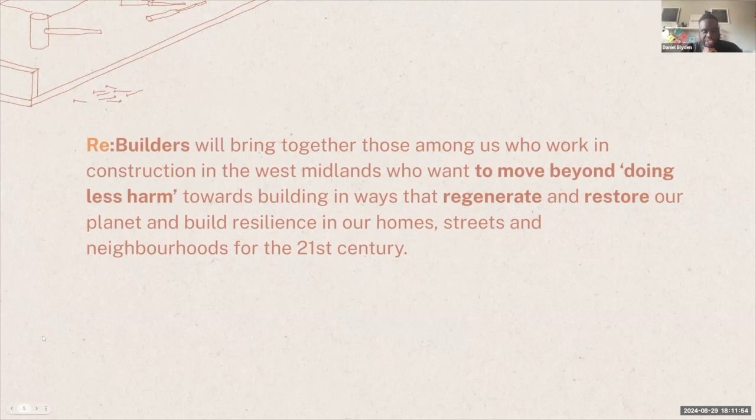We recognize this is a shift that's really needed in the built environment sector, moving from degenerating to regenerating. On the next slide, you'll see a visualization by Bill Reed, who talks about shifting from sustainability to regeneration. In the construction sector there's a lot of talk about sustainability, which sits in the middle of this visualization between degenerating and regenerating. This shows how degenerative ways of building require more energy to sustain, whereas regenerative approaches require less energy. We'll be exploring this paradigm shift and this thinking through the program.

But just to give you a little more background to it, let's go to the next slide.

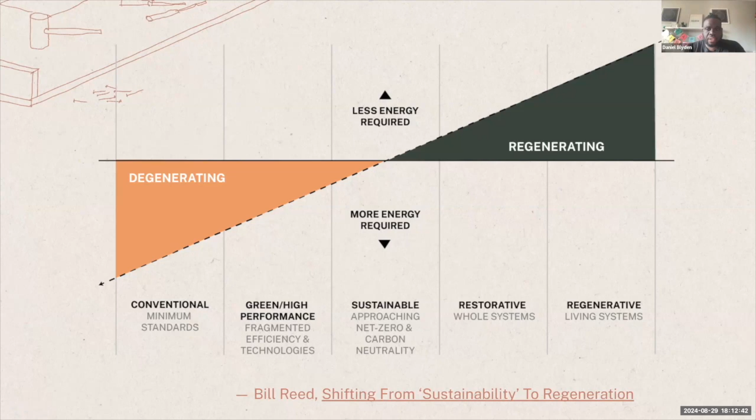We're trying to position this as an opportunity for your business to expand your vision about what's possible with regenerative futures. We'll do this through inspirational site visits across the country, skills boot camps, and live building. We'll hold classroom-based workshops around material futures and how you can build more resilience in your organization to navigate and get to grips with these things. Another theme we'll explore is how we could work more with bio-based materials.

So just to go into a bit more of the structure of how we've put this together, let's go to the next slide.

It will start on the 8th of October 2024 with a 2-day residential at Fircroft College. Then we'll have 4 hands-on skills boot camps and live building opportunities, one within the residential and 3 other dates. There'll be 5 learning visits to different sites, which we'll tell you more about later. Alongside this, we'll host a range of mentors at the forefront of regenerative practice in construction, and you'll connect with them for advice and ideas about the future of your business. We'll also create an action plan bespoke to your organization.

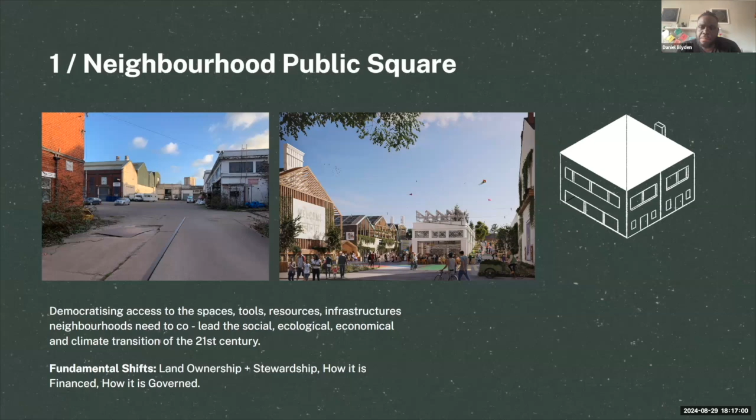The second demonstrator we're working on is called the Neighbourhood Doughnut, which is providing a compass to look at the interconnected challenges we're dealing with, and how we create the metrics and goals, changing the goal of our economy on a local scale. We use the framework of doughnut economics to design this at a neighborhood scale, and do a lot of work to socialize this idea and framework across all levels of our work.

Then finally, we have the neighborhood transitions side of our work, which is all about looking at street-based systemic demonstration of the carbon, energy, ecological, built environment transitions led by the neighborhood. So what that looks like is working with people in their streets, where they live, to look at all these different strands of transition that need to happen at a neighborhood and street scale.

There's many different ways we've been organizing around this, building movements both locally and nationally, which we can share more about later on. But that's a little bit about us, and we've got a track record of doing these learning journeys. We're a multidisciplinary team that works at lots of different scales.

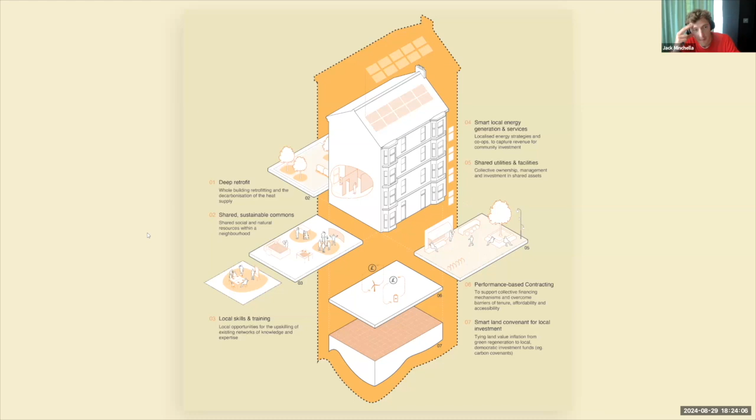Most recently, and I think this is what led us here in a sense, was looking at climate risk extended out for the next few decades, and the current trajectory we're on. There's a positive vision there that I think we're trying to shape, and how do we take theory and research in our practice and bring people on the journey of entering this world so that we can face it together.

And that's us, I think. Thanks, Tony.

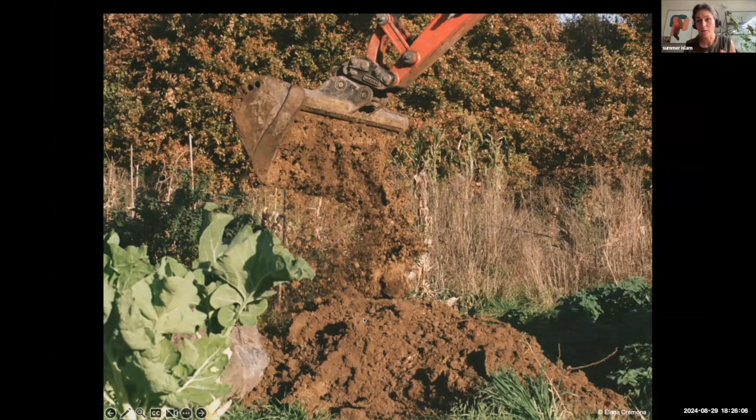Partly that's through the buildings we design, also the research work we do, and the education projects we get involved in. The way we approach the materials we use in the organization is starting to think about waste streams that come from agriculture. We see the potential for the relationship between agriculture and architecture to be reinvigorated, as it was historically in different building practices.

When we design buildings, we work as much as possible to integrate natural materials, and obviously that happens within a regulatory context. So we have lots of experience now of where they can be applied and different ways that's effective on a construction site. We often work with those materials in ways which are modular and employ prefabrication systems, predominantly to bring the costs of those buildings down for our clients, and also to make the process of making those buildings hopefully simpler and more efficient.

Where we're engaging with existing buildings, we look to work with retrofit - either stripping back materials or introducing new ones, trying to understand how you bring bio-based materials into existing building fabric that may or may not be natural or low embodied carbon in and of itself.

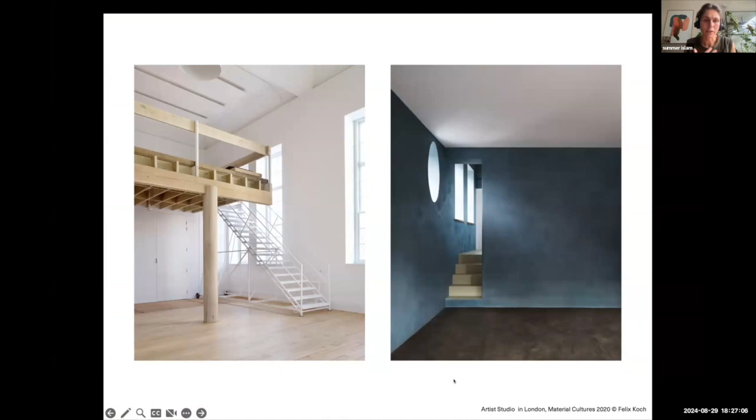The research that we do pairs along with the design. Predominantly we're interested in figuring out where the materials we work with come from, and that means looking strategically at how those materials could be scaled up. Over the last few years, we've begun to understand how the material supply chains work in the UK, and where bio-based material fabrication and manufacturing is already beginning to take place.

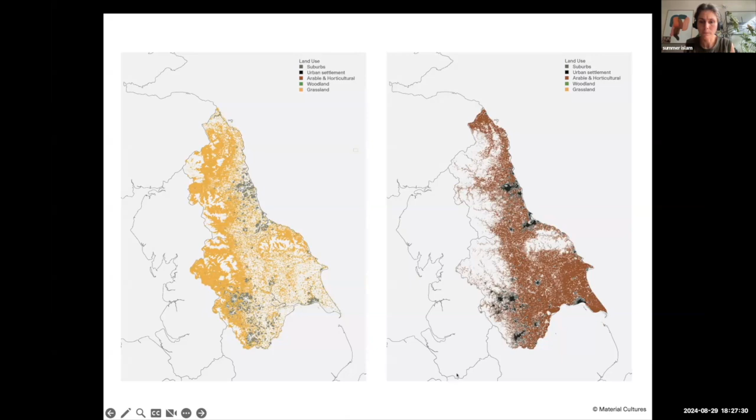Particularly in the context of this program, it'd be really interesting to talk about how those materials and ideas scale, and that's where we want to be taking our design work now - thinking about larger scale building projects.

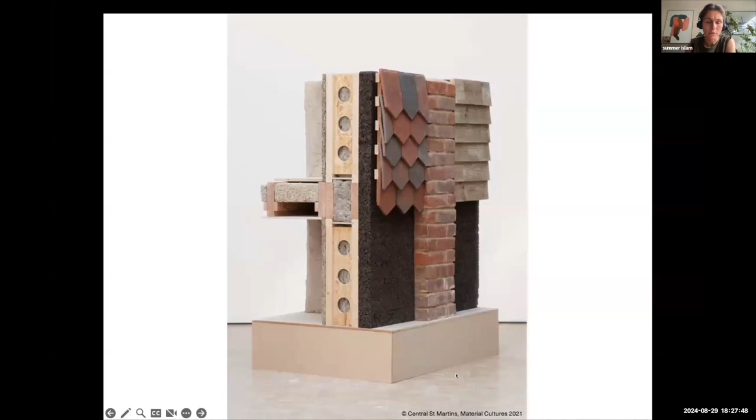Relevant, hopefully, to what we'll be doing together in the hands-on workshops: the way we work in education, to think about the relationship of these different materials and how they're employed in construction practices, is to build and construct fragments at one-to-one - like an on-site construction mock-up, looking at the different junctions and details which become more complex in a building project. That's how we start to resolve and address the building regulations and the concerns of the fabricators and contractors we work with, and it becomes a central mechanism for our design organization.

In the teaching work that we do, we began in institutions, and over time we've moved closer and closer to the factory or the construction site, and hopefully the construction college. So more of the work we do as an organization now is at the platform level, engaging in and facilitating skills provision on construction sites. If we're doing a building that employs natural materials, we'd run a workshop through that project, or independently, we work with skilled practitioners to run clay plastering or hempcrete building workshops, which are open to different people to join.

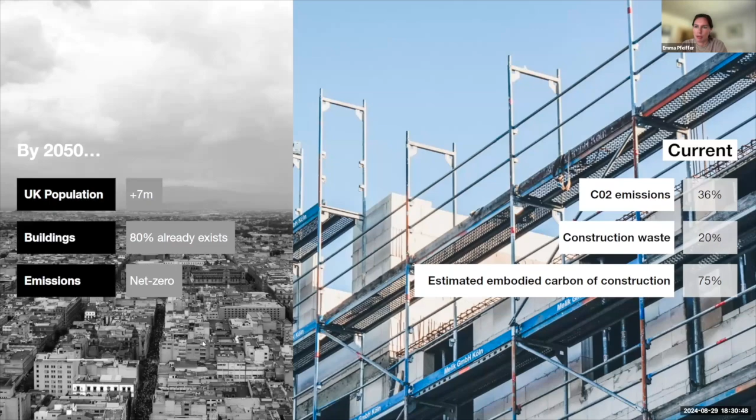This work, 3 Degree Neighborhoods, which has been mentioned a couple times by now, was something we published earlier this year as a collaborative effort between us at Dark Matter Labs and Civic Square, trying to understand the current risks UK urban neighborhoods face in this century associated with climate and ecological breakdown. This piece of work produced a lot of ideas about how neighborhoods and communities can respond to the risks we might be facing. At this point, we're interested in taking some of these ideas, putting them out into the world, and seeing where concrete action can be seeded.

If we could go to the next slide, please. Thanks. This work was based on existing research by climate experts, coupled with some work in design and futuring by our organization. So this is a sense of the palette of things we were looking at in undertaking 3 Degree Neighborhoods.

Next slide, please. So what does a 3 Degree neighborhood mean? At the time of writing, the global mean surface temperature was 1.3 degrees above pre-industrial levels, and most climate scenarios today aim to keep us below a 1.5 degree change threshold. But we were looking at 3 degrees. Next slide, please. In order to point ourselves toward ambitious action, because the current trajectory suggests that by 2100, we will in fact have broken a 3 degree climate change threshold.

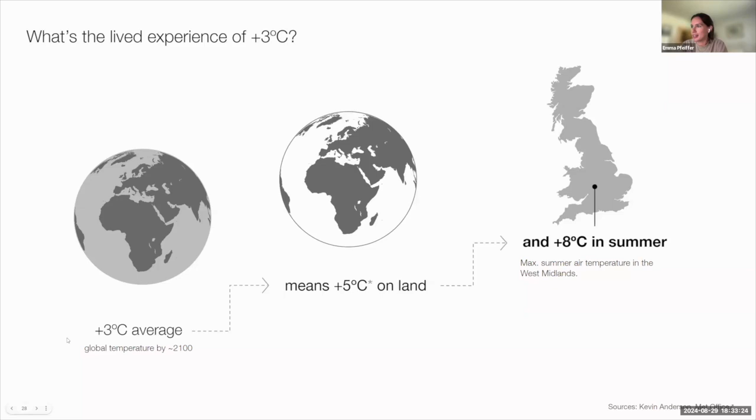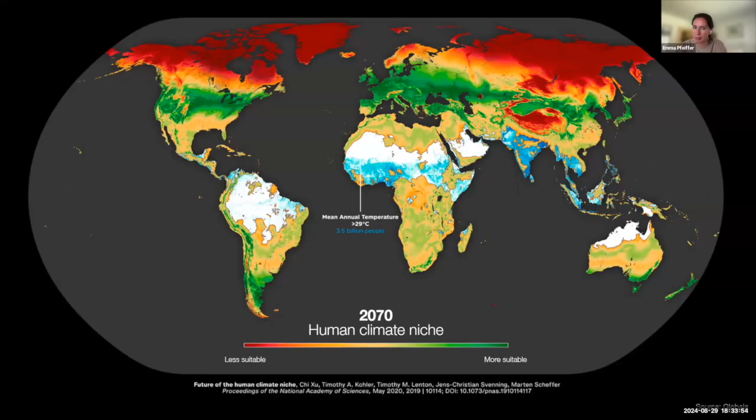So heat is one of about 6 entangled risks that we looked at as part of this work, along with drought, flooding, food shortage, climate migration, and the cost of living. You'll see here that in addition to these more straightforward measurable risks, there's also a strong layer of social entanglement.

So today we're focusing on heat for the purposes of this presentation, but we couldn't isolate any one of these risks from all the others.

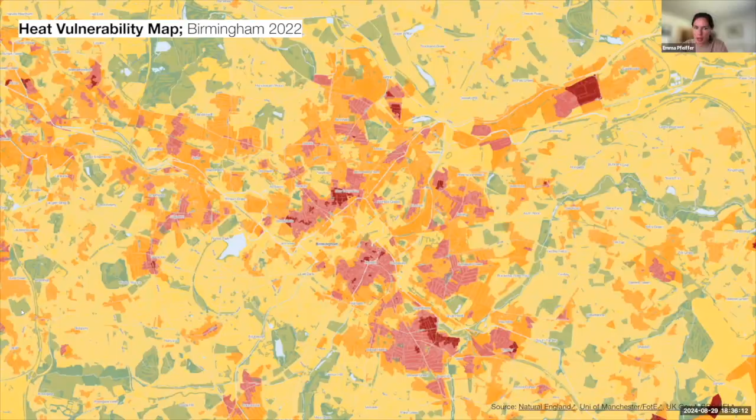And at the global scale, this idea of uneven distribution applies across historic emissions. So it could be said that on the basis of per capita carbon emissions since the time of the Industrial Revolution, higher emitting countries such as the UK and the USA have a higher responsibility to act. This is part of the reason we're so interested in bringing this work out into the world.

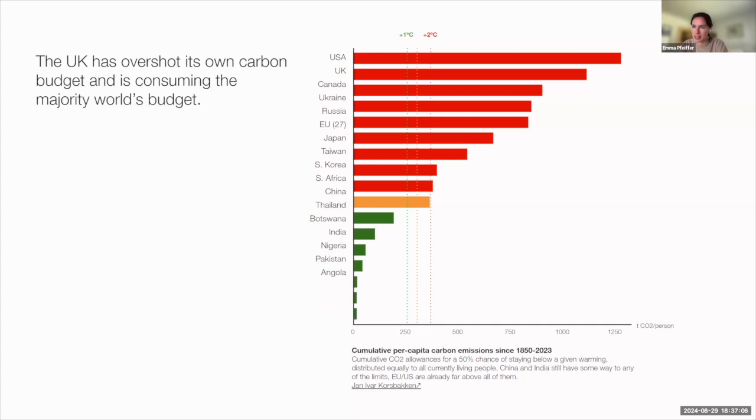So at the global scale, this uneven distribution of climate responsibility could be discussed through ideas like carbon budgets. But we're interested in finding new ways of talking about this at the scale of the neighborhood, to think about what it would mean to take responsibility for emissions associated with the places that we live and the ways that we have lived over time.

More or less, the point is that climate breakdown and global temperature rise are symptoms of a problem rather than the problem themselves. As we've seen, the built environment is really mixed up in these issues. This is part of the reason why we're interested in working with the construction sector to think about what this means for people working in the built environment.

And I think I'm going to pass back over to Jack at this point.

And so as we've seen with the built environment, there's an urgency with which we need to engage with this at a much deeper level than just the carbon emissions of the buildings. Yeah, if you jump to the next slide.

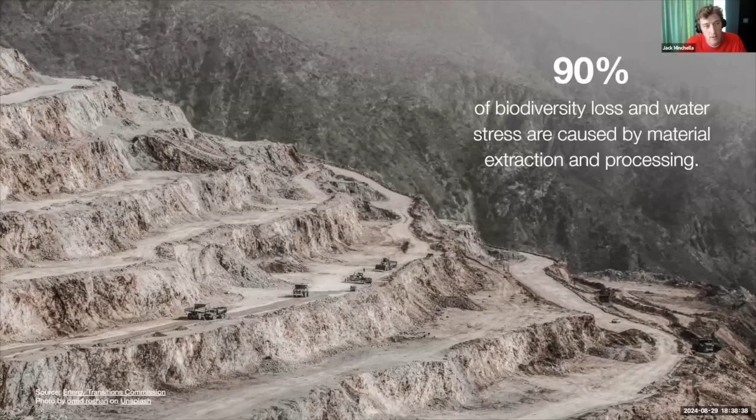Material consumption is a huge driver of biodiversity loss and water stress, and that will continue because the green transition, and how that's currently structured in terms of retrofitting and renewable energy, will demand a greater amount of materials than we're currently using. So some of the solutions are driving the problem even further. How do we engage with that on a more structural level, and then figure out how we can test new things at the real local scale - that's the focus of this learning program really.

And if we look at our carbon budgets, even to 2030, we need to reduce that by vast amounts. So this can't just rely on the material side of things. It's also like, how do we work? How do we understand our networks of influence? How do we innovate into that future?

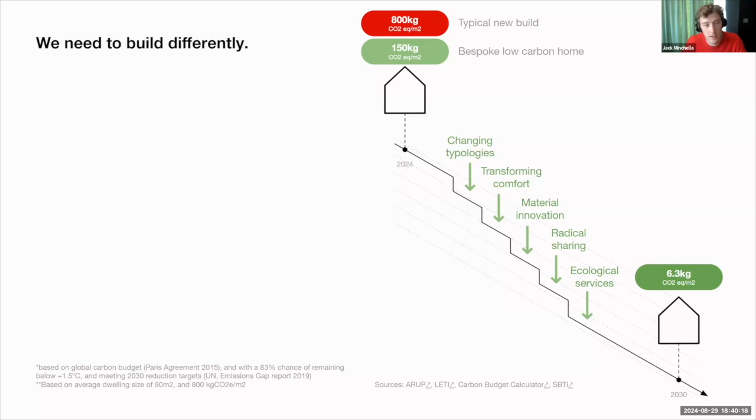How do we operate differently, socially, in relation to our technical efforts to reduce carbon and shift the construction sector? That's how we want to bring to this program some thinking about how we consider a neighborhood's social infrastructure and physical infrastructure, and what it means to be an individual or an organization running in the neighborhood with an eye on that future, rather than just through a product or service lens. It's more about bringing in this wider picture of engaging with the wider context.

So this was a little bit of the drawings - these are all published online, and we can share some links to these. Just looking at some of the interventions that might happen and the co-benefits that stem from those, bringing that lens of asking where we draw these connections and how they manifest at the very local street or neighborhood scale.

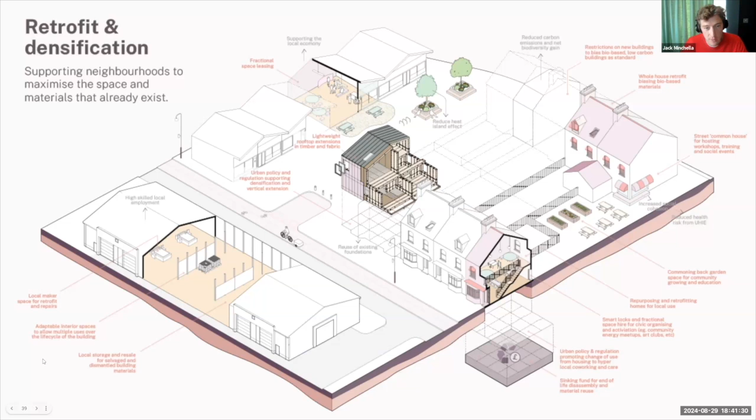So this one was looking at retrofit and densification as a core bit of transformation of the neighborhood. The next one looks at regenerative resources - not only materials but energy infrastructure and water infrastructure as well.

So Re:Builders is about taking that large global context and bringing it down into a learning program over the next 6 months. That's really what we're trying to do - join some of those dots, bring people into that conversation and into the knowledge bank we've built up so far, and then explore further what it means in real life.

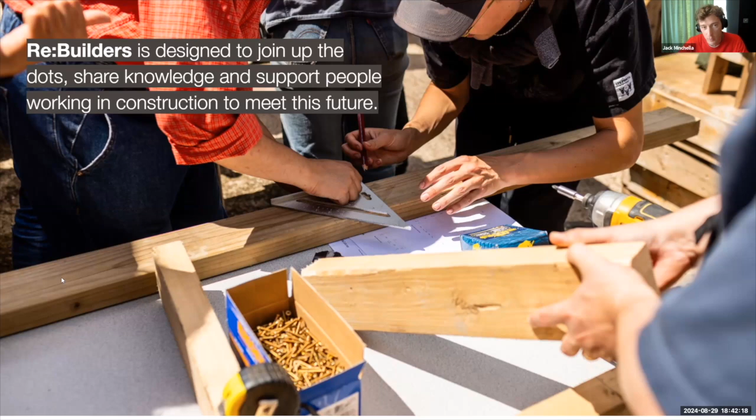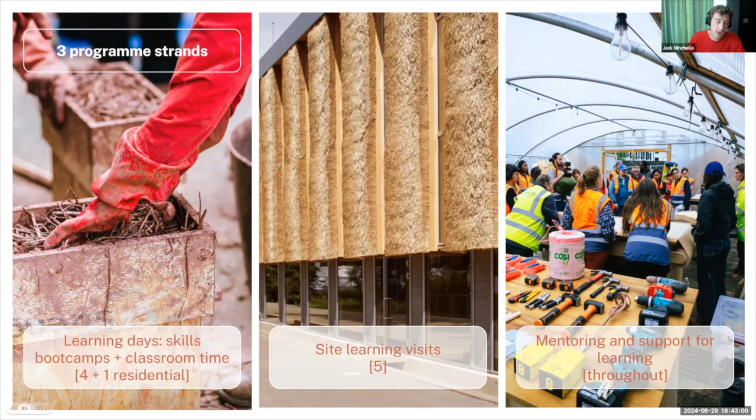That's going to be the sort of flavor and structure of the program itself. Some of it will be learning days, with classroom time focused on some of these things we just talked about. Some of it will be about how people have already been looking at this and building it, with site visits and learning around that, and then connecting to people already putting it into practice with mentorship and support - thinking about your own business or your own professional journey as well.

There are some themes we're working with in terms of the overall context. We want to look at materials and how they sit in the bioregion, which you've heard about from Summer and a bit from Daniel, and the networks and neighborhoods and Civic Square's role in that, and how it connects to the donut economics work. And then some thinking about co-benefits, and how we link different transitions we might see in the neighborhood, or even services that might happen in social infrastructure around that.

That'll be the theme and flavor across the 6 months, and obviously then it meets the practical learning and hands-on experience, which will explore more of the materials and processes, and some of the supply chain work around that as well.

If you jump to the next one, Charlie. So maybe I'll hand back to either Daniel or Charlie. Summer, if you're okay to share a little bit about the building scale side of this now, that'd be wonderful. Yeah, just give me a sec to set this up again.

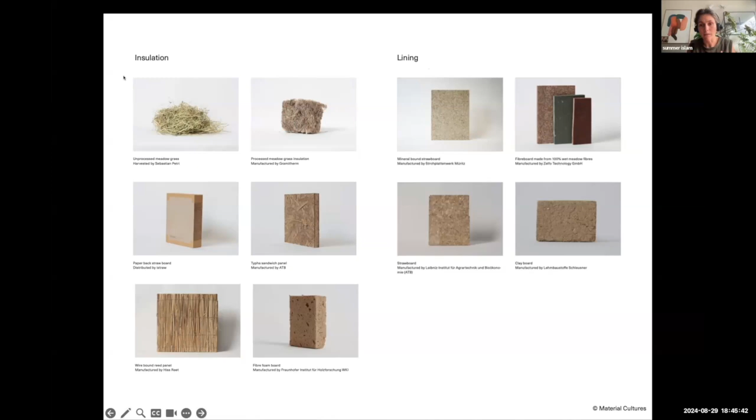So thinking about the standard things used to put a building together, and how they can be substituted for bio-based alternatives - essentially materials made with plants that sequester carbon, reducing the embodied carbon of the building and also making the environment of the space healthier to live and work in. We'll be talking about not just the materials we're looking to substitute, but also the impact of the mainstream materials on the environment around us.

So I think part of the curiosity we have and that we'd like to share is what the materials are made of, where they come from, and what the impact of making them is - downstream in terms of pollutants, extraction, and the kind of social impact of different forms of material fabrication.

And I think the consideration there is not just for the broader environment, it's also for the bodies of the people who work in putting buildings together. Lots of the materials that are mainstream today have different levels of toxicity that are less well appreciated in society, and it makes the labor of putting buildings together incredibly dangerous in different ways.

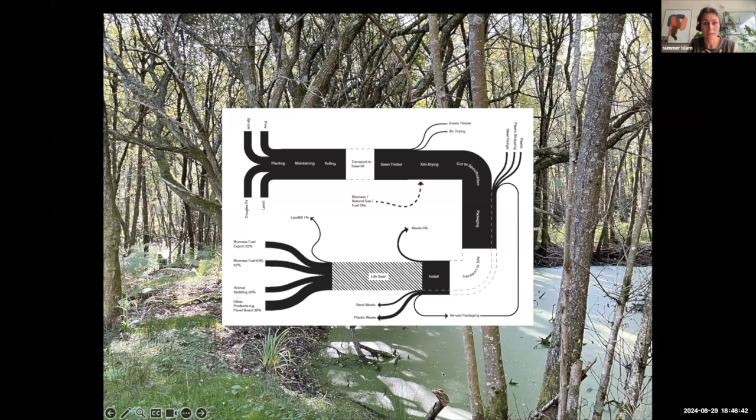When we have that conversation around what materials we could be exploring in the future, we're also interested in thinking very technically about how they can be applied in new builds and retrofit applications in ways that meet the regulatory system we operate in.

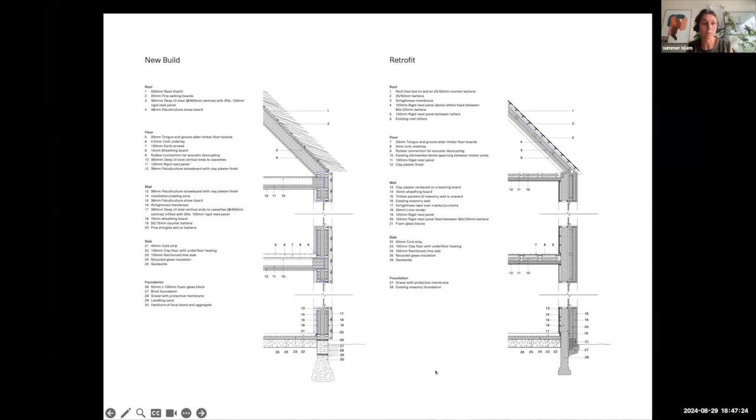There's lots of really exciting and innovative material work out there, lots of new bio-based materials, and quite a lot of traditional ones we know used to work really well, things like thatch and other vernacular techniques. But the focus of our conversation is what's practically available now that we could apply within the building industry today - what change is accessible to us that we can begin to employ.

The next step, maybe a secondary consideration but still important, is the way those materials are applied - that they are and can be very beautiful, and there's different ways of employing them, whether embedded and concealed within a structure, or expressed. I think there's lots of opportunity for new skills to be learned, and for the repertoire of techniques and green resilient skills available within your organization to grow.

It's an undeniable factor that there is cost associated with changing the way we work, because the whole industry we operate within is very inert and slow to transition. One of the ways we talk about addressing this is through techniques of prefabrication.

There are modern methods of construction that are scaling up. We think there's lots of opportunity for things like SIPS panels to be made with bio-based materials, just as they can be made with polyurethane. It's really all about technique and skill, and those are things which are very accessible to people who work in industry.

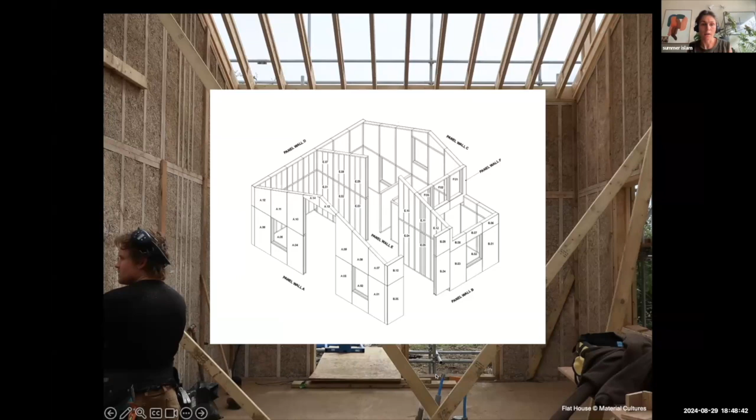We've got quite a lot of experience now in building with and implementing modular bio-based systems, and when we do this as designers, we look to generate building typologies which are replicable - thinking about how a building in one place could be deployed in another, which enables us to think about economies of scale and bringing the cost of these materials down.

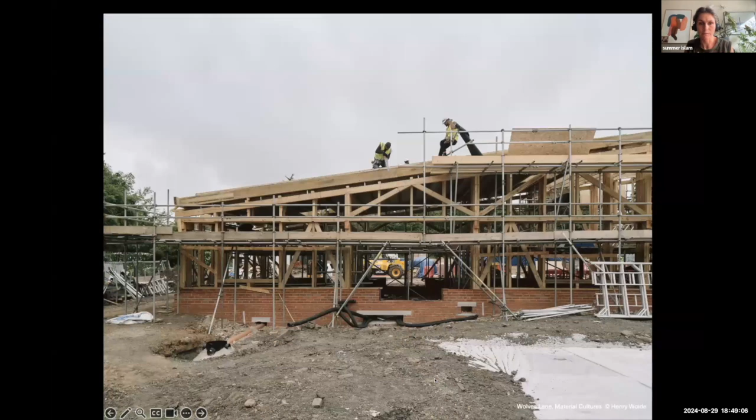In the context of the program specifically, we're thinking about how the building site, the construction college, and our space together in conversation becomes a place of learning. And I think we're really interested in a dialogue around how these skills and these opportunities for organizations like yours can begin to grow and to scale.

What we do in practice is we use building sites as ways to bring other people along with us - whether that's members of the community or the contractors we work with and the different SMEs whose skills we rely very heavily on.

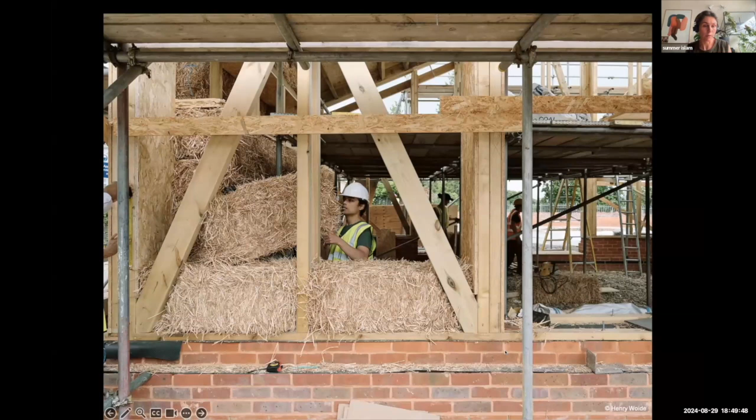Essentially, this program is about extending the skills available within the built environment industry, and making the work you already do climate resilient in the future - to really think practically about what it is when people talk about green skills and green jobs. What do we mean, and how do they begin to tangibly impact the work you do on a building site?

Also, I think to think differently in the future in the context of the neighborhood scale work that's been described, about how buildings can come together. Are there different layers of responsibility, where you have shell and core delivery from contractors, and some of the fitting and finishing and fit out either from a subcontractor or maybe in the future from a community within the neighborhood scale?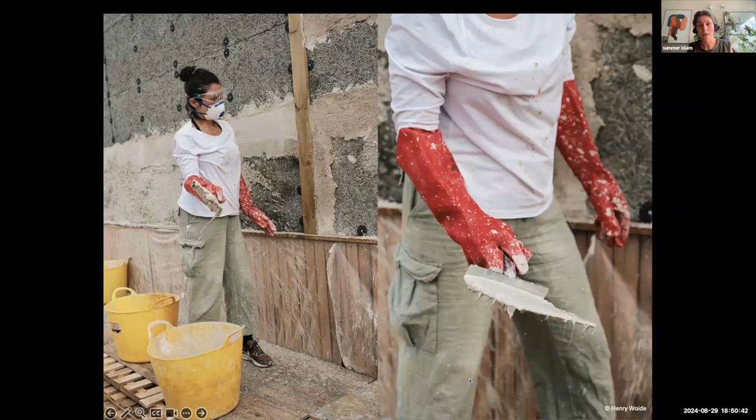That's kind of the work we've been doing - looking at how you empower communities to finish the buildings themselves, but also more broadly, how do we make what are conceived of as traditional or heritage skills mainstream? Things like lime plastering, for example.

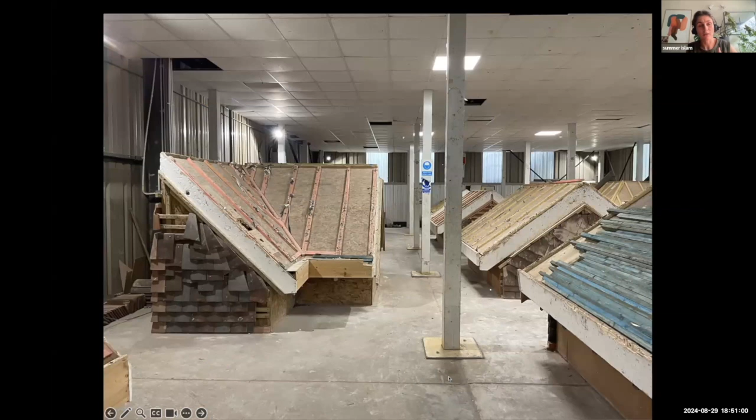Through the work we've been doing recently, we've been visiting and consulting with lots of construction skills colleges and providers. Part of what we'd like to do with this program is talk about how we grow the demand for these different materials to the extent that skills provision in construction colleges and schools can begin to be impacted. Really, the place for that to happen is within the businesses, within the people doing the work on construction sites. That dialogue is something we're really interested in having with you, because ultimately we think there's an extraordinary opportunity for change.

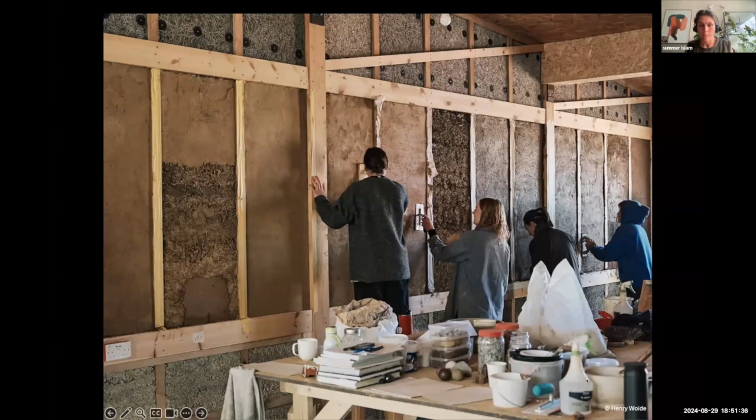Whilst there's a spectrum of exciting, niche and innovative bio-based building materials that aren't yet regulated, tested or certified, there's actually loads that are ready to roll in industry, and you can buy them from local material suppliers and building merchants. We're going to look at how those different systems come together, thinking about ones which already have traction in industry and that traction is looking to grow. Also, skills which we think will have resilience in the future because they'll grow in popularity could begin to be embedded in the organization. These are currently considered quite high-end niche things, maybe clay plastering or lime work, but also modular systems that work with very low-cost materials like straw or wood fiber.

In the course of the program, we'll lead you through a series of skills workshops, working ultimately towards the production of a building fragment, not exactly like this one - this is one we made earlier. Maybe using materials which are a bit more mainstream and relevant in your average construction project today in the UK. At the core of these skills workshops, we'll be working with certified installers who have experience in natural building materials, giving you the opportunity to interrogate them about the pragmatism of the materials they work with and how they employ them. We're looking at materials which have a direct role of substitution in conventional building fabrics, so we start with the ones we already have to hand.

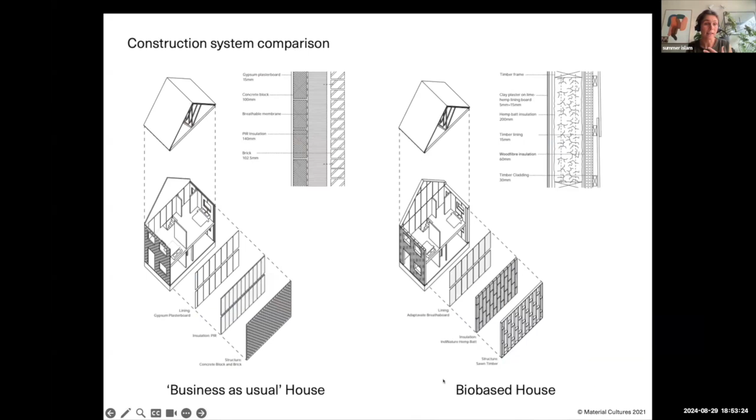Yeah, thank you. Hi, everyone. I'm Emmy from Civic Square, and I wanted to pull together before passing over to the second half of this, which is going to tell you even more about why we're doing this and what it's going to look like practically as a program. We all in many different ways have quite a self-interest in doing this work. A lot of the sites that are part of the program that you're going to visit are projects that are trying to, like us, at a neighborhood scale, bring the global complexities and ideas that Jack and Emma talked about, particularly in 3 Degrees, into practice.

Daniel talked about the types of demonstrators we work on, particularly street-based retrofit and the public square that we're building. That focus is really about being able to make things with people at the scale of the neighborhood that are tangible demonstrations you can touch, see, feel, experience, that grows the skills, capacities and imagination of both the place, the people involved, and all of the ecosystem of people who are part of that.

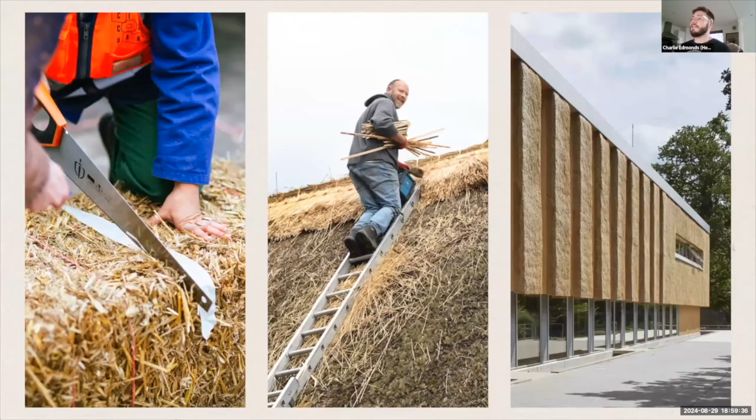Yeah, thanks, Amy. So in the spirit of thinking about how we want to be working alongside each other, rather than this being a kind of separate participant-host type relationship, I think one of the reasons why that framing of people working alongside one another is so important is if we think about...

How uncommon a lot of this is. How unusual it is to see a building today assembled with bio-based materials, just how unusual it is to see a building assembled according to primarily social or ecological value rather than cost or profit, for example. It's important to acknowledge and name that these things are not the norm right now, because that gives us an extra dimension to this work, where we understand that a really crucial aspect of what we're trying to do is shift the Overton window.

If you're not familiar with the concept, the Overton window is essentially a metaphor that helps us think about what is viewed as possible. This could be at the scale of an organization, or it could be at the scale of an entire national economy.

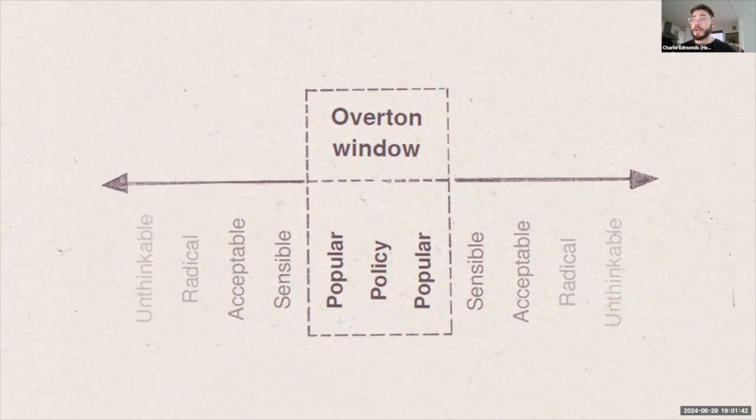So what we are really trying to do, both in terms of what we want to build in our neighborhood, but also in terms of what we want to achieve on this program, is sit at this stage of building and evidencing the need for emergent systems or emergent practices in construction.

So as we know that materials like concrete, petrochemically derived materials, become less and less tenable and feasible, what are the alternatives to these? What are the regenerative practices that can step in to fulfill new housing typologies and approaches to things like retrofit that we know are going to be, already are, and are going to be so important.

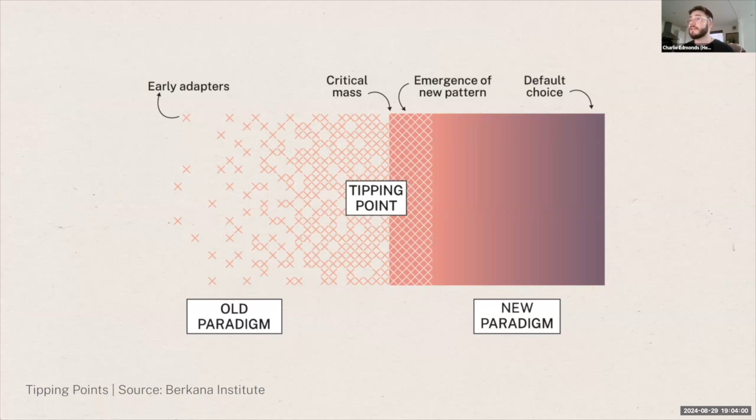So one piece of language you will probably hear several times throughout this program is that of demonstration, of systems demonstration. When you've heard about our work like the Neighborhood Public Square, when you've heard about neighborhood transitions, these are ways that we're trying to create systems demonstrators to show almost models, tangible vehicles of what could be created elsewhere, what could become more normal. And a really instructive and foundational case study in this for us is actually the creation of the NHS.

So if you didn't know, the NHS, if you trace its history all the way back, finds its intellectual origins in a Welsh town called Tredegar. This town had a lot of people who were mining, and they made the observation at a community neighborhood scale that there were a lot of shared health conditions, and that the individualized private approach to healthcare and to health was not really serving their community in the way that it could do best.

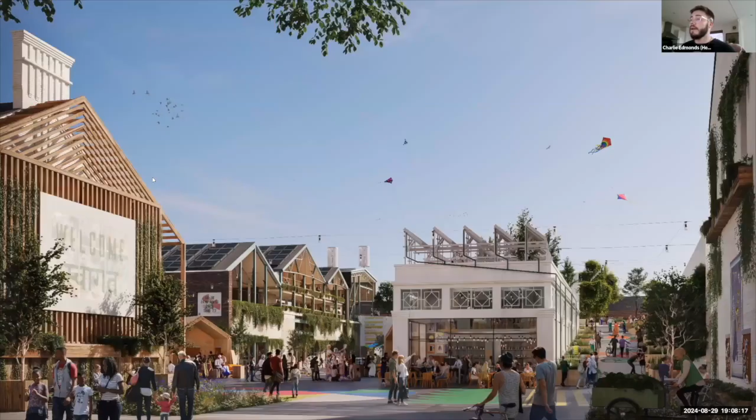And so this is, like I said, one aspect of that for us, which I think we've already shown you, but this is a sort of early vision for the Neighborhood Public Square. And this is the type of demonstrator work, the type of direction for construction practices that we want to be able to move towards alongside the people who join us in this program.

As Amy said, we really jumped at the opportunity to host this because we know that to reach those tipping points and have these larger ripples that will influence systems, we really need to be finding everyone else who's in the position to do this work alongside us.

I think it's really important to acknowledge that this is something you can observe in many different ways through many different types of language throughout the UK and throughout different steps of the industry.

One project which will hopefully be one of the sites we go and visit, the Enterprise Center, shows how it wasn't a simple matter of people learning bio-based material skills, or even learning traditional methods that may be starting to be lost or reviving those methods. They also identified ways these methods could be incorporated through modern methods of construction, to make these projects more feasible in ways that Summer already described, but also have a reciprocal relationship with the supply chains themselves.

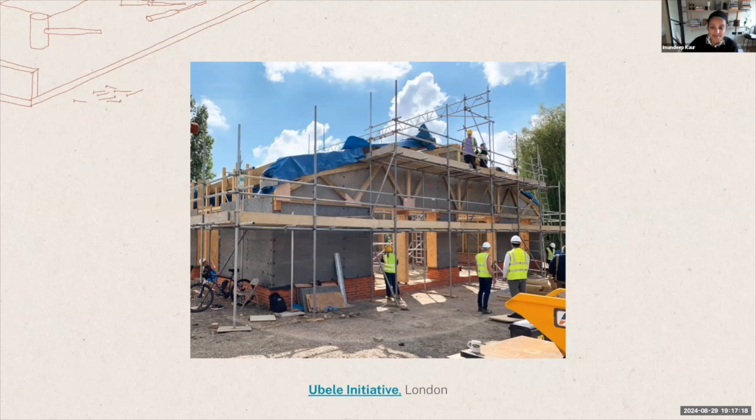Oops, I think Kavita might have frozen. Until she comes back, I will carry on from where she finished off.

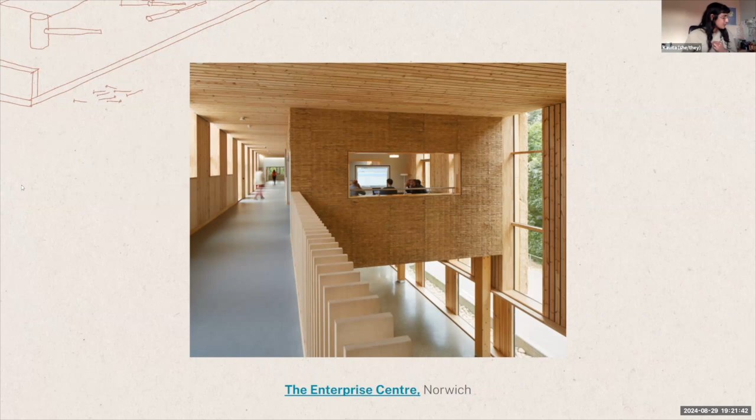The Enterprise Centre in Norwich is another one. It's an amazing new build building that was built to Passive House standard, and I think it was BREEAM Outstanding rated. Next one please, Charlie.